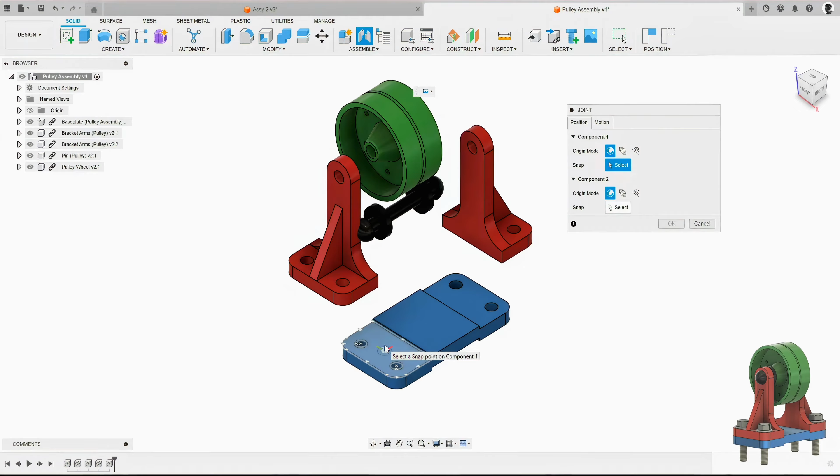The process here is to select a joint on one part and then a corresponding joint on the other. For example, I'm going to move to the base of this bracket here. As we hover the mouse over the face, we'll start to see all of these joining points appear. We can select one of these. The one in the very center is the most logical one to go for in this case, so I'm going to select this joint here.

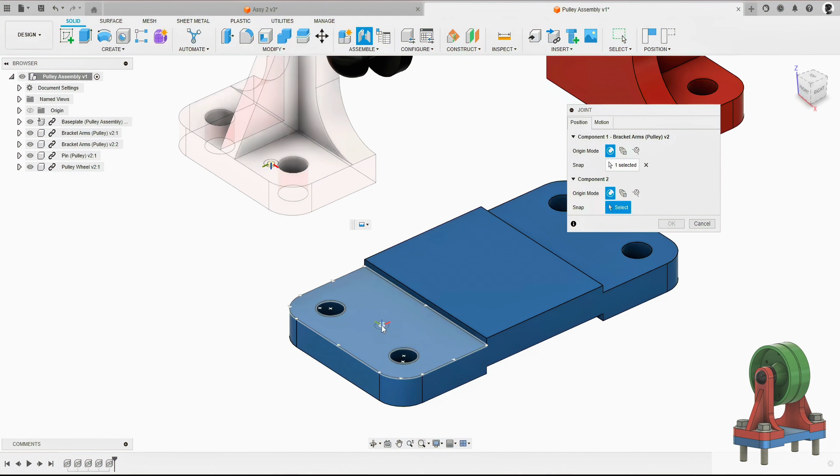If I rotate the part and come onto the base plate, and hover my mouse over this part here, the corresponding joint would be right here in the center. If I left click there once, we'll see the bracket arm move to that position, and then we can offset it. Where those two points are joining, we can offset it in this direction or this one. We can also rotate the angle as well, and you can control any of these parameters in these boxes here. Then we press OK.

That's looking good. If we look at the top of our toolbox, we've got position and motion. If we go into motion, we can select different types of motion. Rigid is essentially rigid, nothing moves. We then have the option for Revolute - about that joint between the two parts, this bracket arm can revolve, in this case around the Z-axis. There's also the option for slider and various other motions as well.

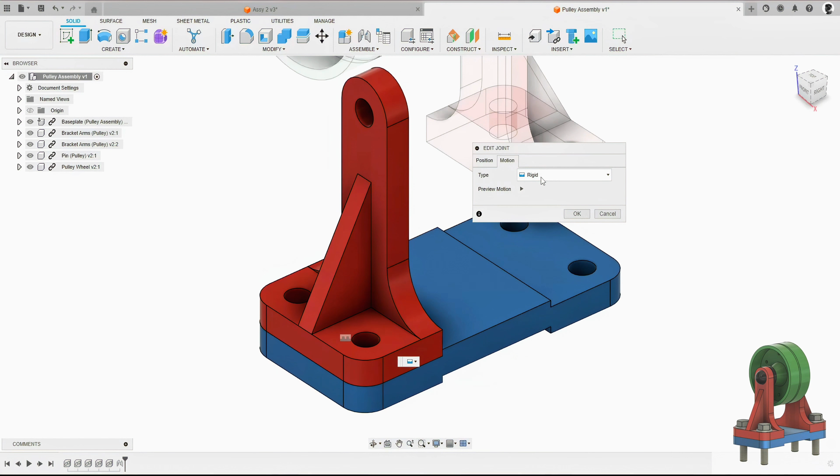But for the majority of cases we'll be using rigid motion; we will use Revolute for the pulley itself - we'll get onto that later. For now, let's make sure we've got rigid selected. My position, I'm happy with that joint type, happy with the alignments, everything there is good. Press OK. Now if we try to move the bracket arm, we're unable to do so - holding down the left mouse button, it cannot move.

The same with the base plate. Well, the base plate is grounded to the origin, and then the rigid joint between this bracket arm makes it unable to move. However, this bracket arm we can still move. So let's put a joint in there.

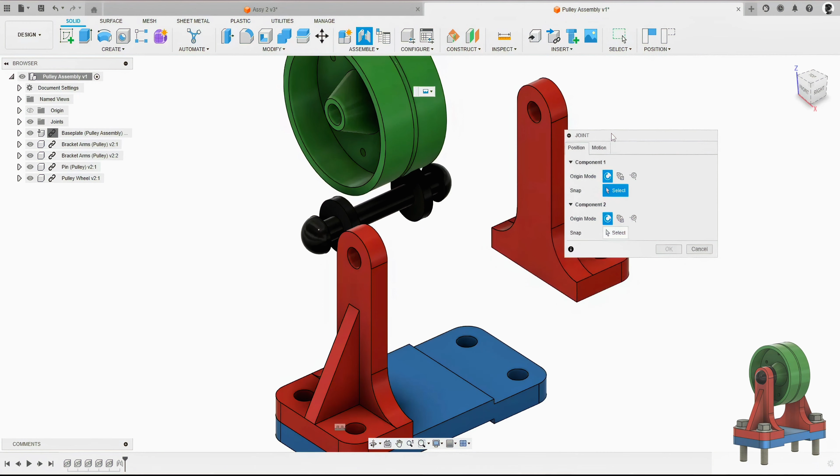Let's press J on the keyboard. I'm going to do this slightly differently - instead of selecting this middle point here, I'm actually going to choose the center point of this circle, just to show you that this is another method. In fact, there are many different joining points we could use, but just for example, I'm going to select this joining point here.

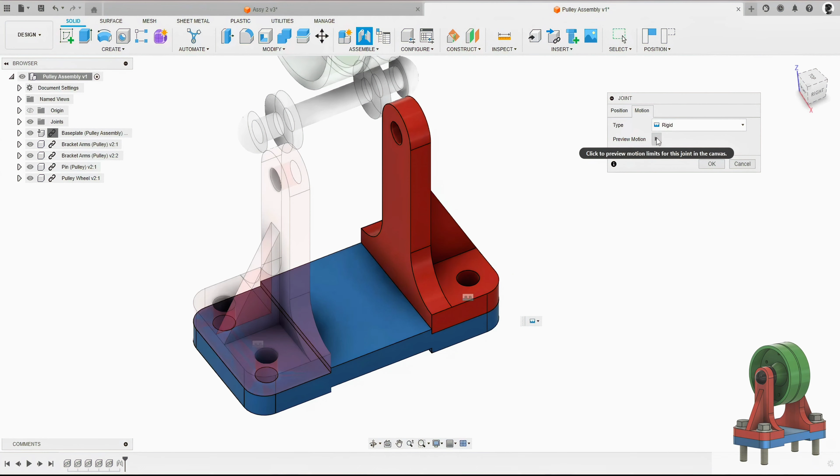Then the corresponding point would be the center of this hole here, so left click once there. See those two parts come together. Happy with the alignment, we don't need to rotate that or do any offsets. In terms of motion, we want that to be rigid as well, like so. That's good, it's okay.

And now this part we cannot move as well. Good, we're getting there. Now we need to position our pin. Let's hit J on the keyboard - again, a variety of ways in which we can do this.

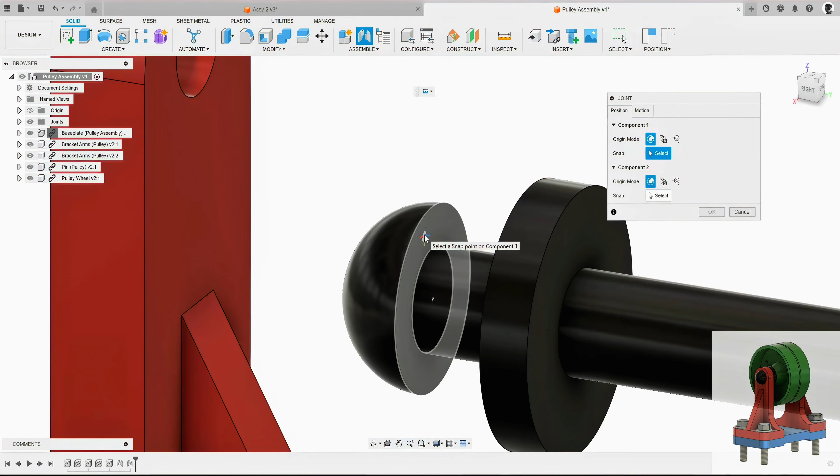I'd say the most simple way is to select the center point of this face here. With my mouse over this face, I'm going to move the mouse down - I can select the center point there, as we can see. So I'm going to left click once. The corresponding joint point will be over here - as I move my mouse over this hole feature, I get the option to select this point here. So left click.

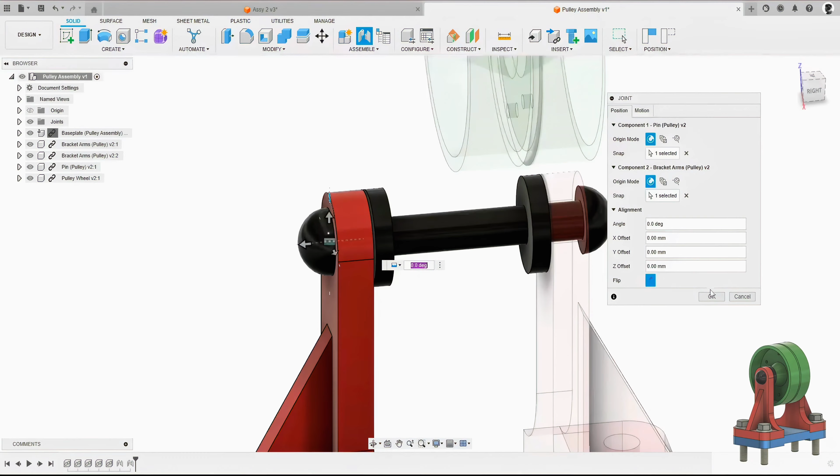Okay, preview's looking good. Everything there is fine, click OK. That's come out nicely, and again that cannot move now. There's only one part left to join, which is our pulley wheel.

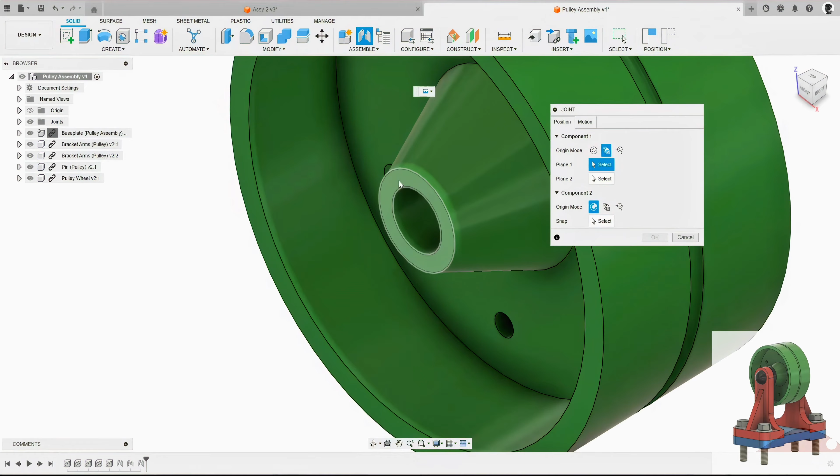We're going to do this slightly differently. I press J on the keyboard, and this time, instead of using the simple origin mode, we're going to use between two faces. I'm going to come across to our pulley wheel and select this face here, and then we need to select a second face - I'll choose the other face on the other side.

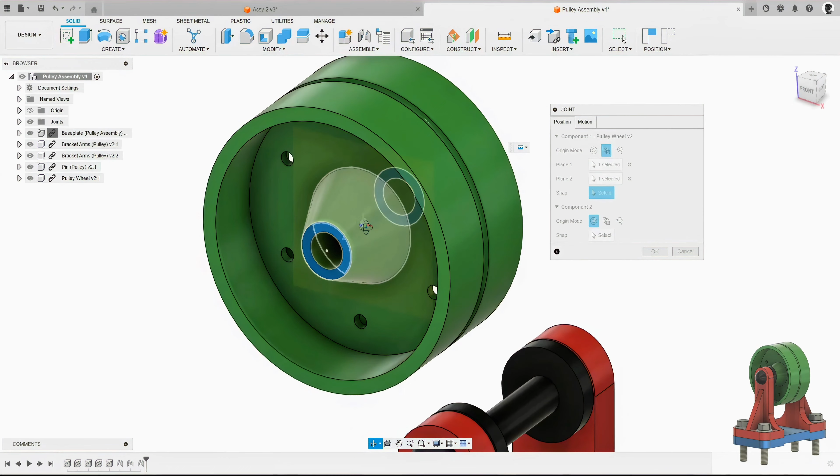What we're seeing is we have this kind of plane in the center. Now on that plane there will be a series of points which we can snap onto. As I move my mouse more towards the center, we can see at the very center there is a snapping point. I want to take that snapping point and left click once.

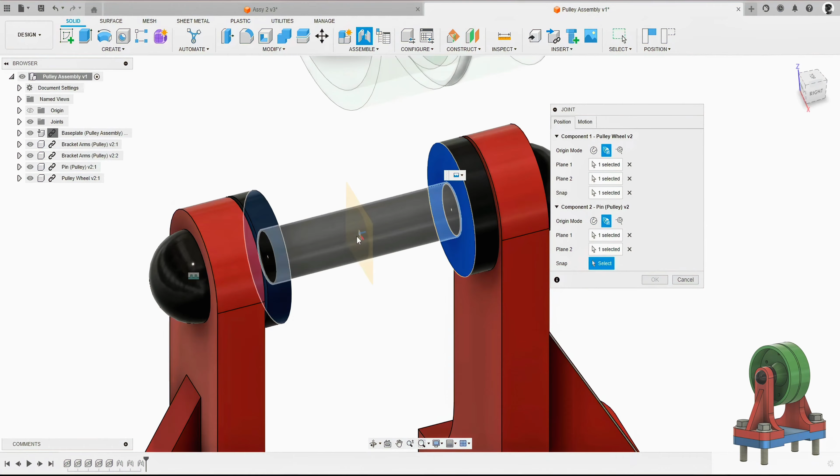In terms of our component 2, we're going to do exactly the same. So between two faces, and this time I'm going to refer to the pin, although we could refer to the bracket arms. For the pin, I'm going to choose this face, then this face. Under my selection point, as we bring the mouse to the middle, we'll see this put a plane up here where we can select only one point here. Left click there once.

Our pulley wheel moves into place. By the preview, that is looking good - happy with that. But in terms of the motion, I don't want this to be a rigid motion. I would like to show the animation and have the ability for this pulley wheel to rotate about that pin.

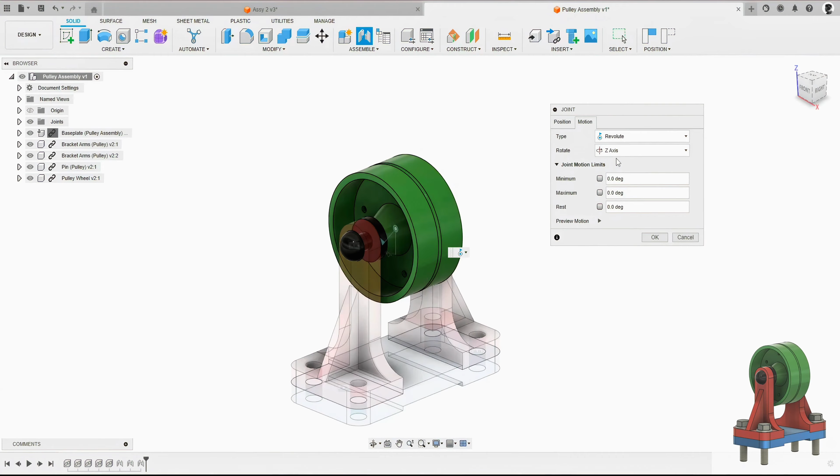So under the type, I'm going to go ahead for Revolute. About where that joint face is, we are rotating, so in this case it's around the Z-axis. Now we could change that and rotate around the X, but that's not exactly what we're after, or likewise for the Y. Yeah, the obvious one to go for is the Z - we look at that, that's what we're looking for.

Now we do have motion limits, so we can set a minimum and a maximum. For example, I'm going to turn these on and put 180, and then we'll see we've got a 180 degree motion limit there. If we click to preview, we'll see it will only travel 180 and then back like so - I cannot do the full 360. That's not what we're after, but in certain circumstances you may want that.

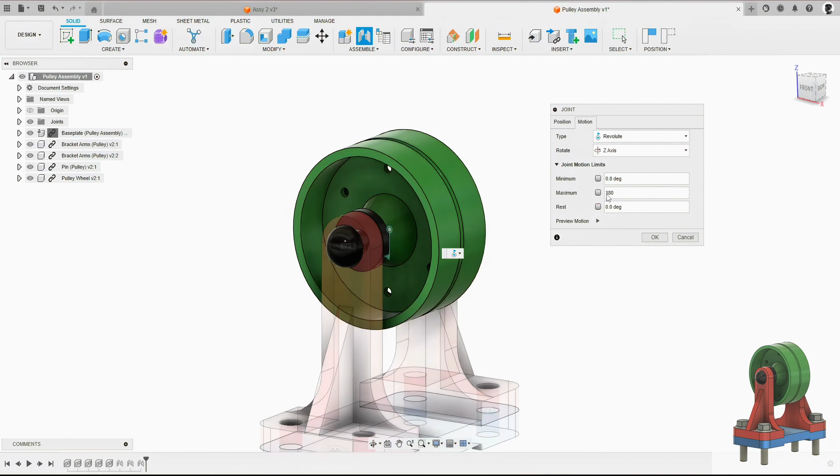We'll turn that off - I don't want there to be any limits, I want the full 360. Let's play that, just make sure we're doing 360. Okay, looking good, let's click OK.

There we have our completed assembly and all fully jointed. You will notice that about the positions of the joints are these indicators that there are joints there now. We can right click on these - we can edit that joint, suppress the joint, animate that joint, and so forth.

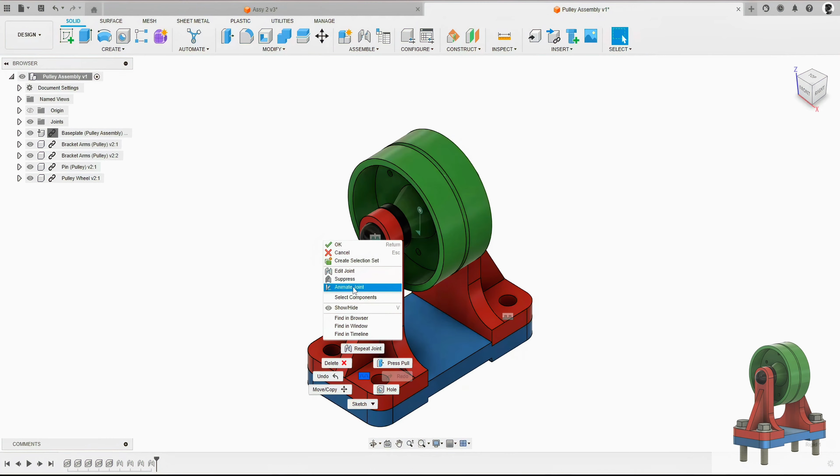So we did want to edit that. Let's say that we wanted to change this one to a rigid joint - come into edit joint, under motion we can change it like so, but cancel there. We can also see that if we come down to our timeline, we've then got the 4 joints there. So we should have 3 rigid joints and then the last Revolute joint, which is this one here. Again, we can edit any from here - right click and edit joint.

If we don't want to be seeing these indicators that we have joints present, we can come under the display settings and the object visibility, and we can turn off joints. Then you'll see that the indicators are gone, and we can just refer to them from the timeline, or we can turn them back on like so.

So that is an overview of using joints in Fusion. I think it's a fantastic tool and an interesting, simplistic approach to forming constrained assemblies. I also think that compared to traditional CAD software, this is much more of an efficient process, but it can be slightly problematic when we're working with large-scale complex assemblies. I would recommend having a good study of the joint tool and adjusting where needed any of the parameters, such as the alignments in the various motion types.